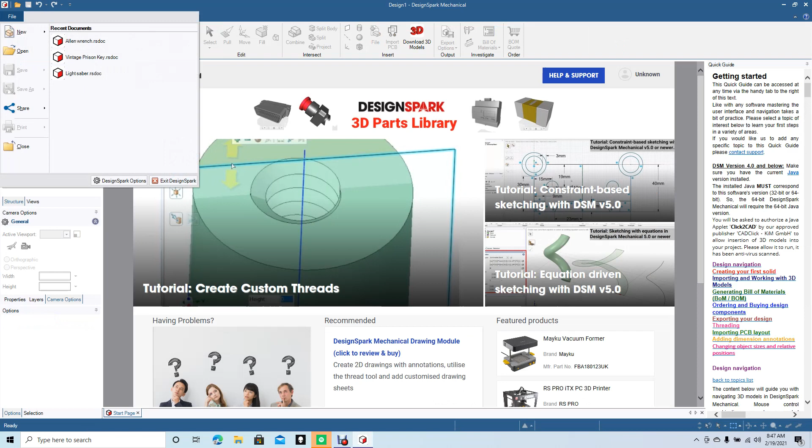Today I'm going to be showing you how to use the sweep tool to create a rubber seal for a cap. We're going to go ahead and create a new design.

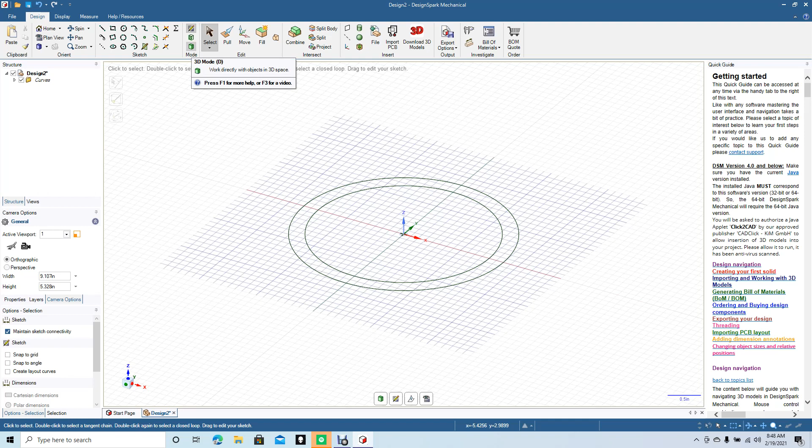Okay, now we'll select to click off. We're going to change the mode here to 3D mode. We don't need the middle part, so we'll select it and hit delete.

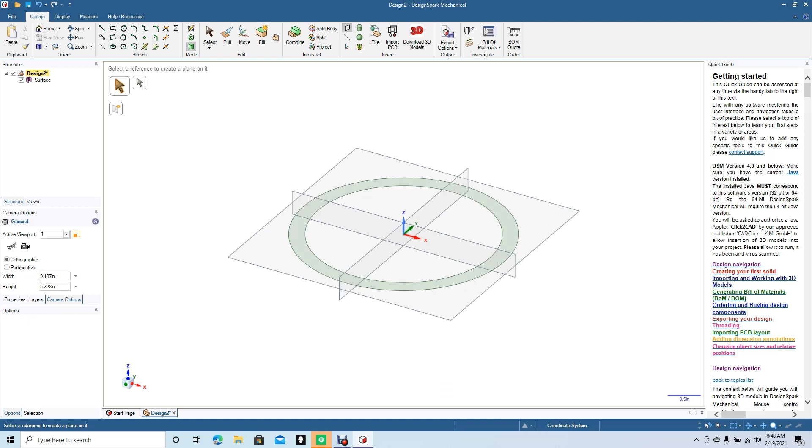We're going to add a plane, so go up to the plane tool and click it. We'll hover around to get one where we want it to go, and click OK to place it.

Now we're going to pull this part up a little bit. Select the pull tool, click on that, and click and drag up. Maybe make it 0.2. Select to click off.

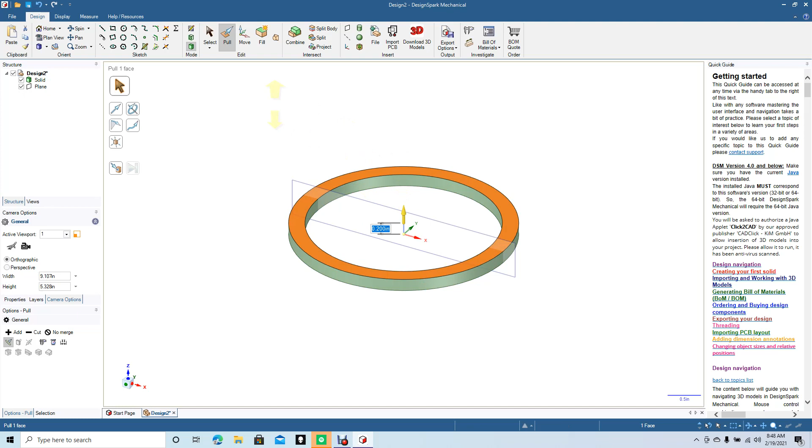Now we're going to change the orientation to front. We'll select the plane by clicking on it, and change the mode here to section mode.

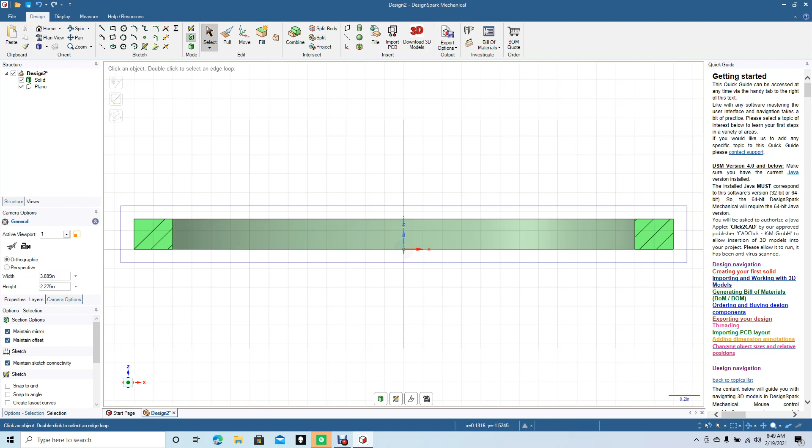Okay, now it shows us half of the circle. What we're going to do is put our seal right here. We'll Control plus to zoom in, and use the pan tool to pan over. We're going to draw a seal there.

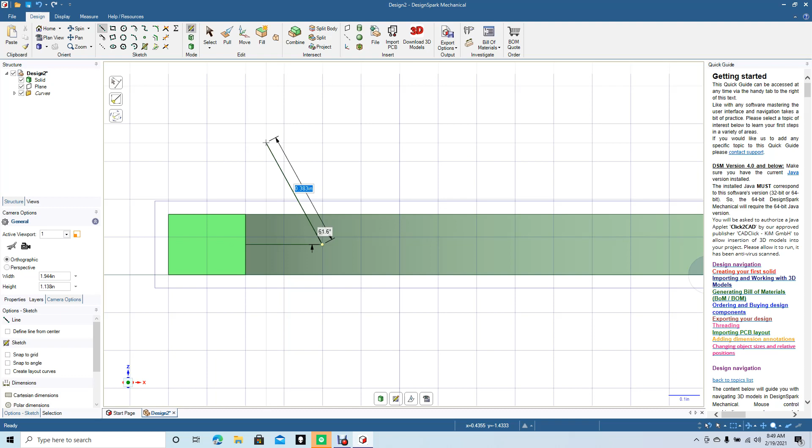We'll go ahead and get the line tool. I'm going to create a line that's a mirror line, so put a reference line in there. Select to click off. We'll right mouse click on the line and set it as mirror, so that way you only have to draw the top part and it'll replicate the bottom part.

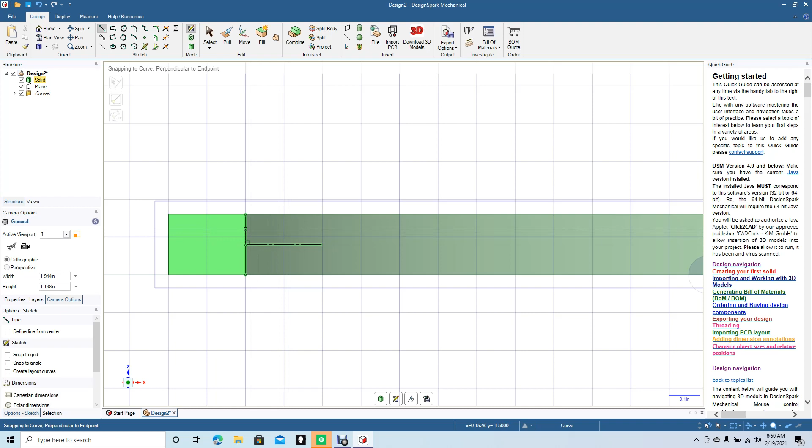Now we'll get the line tool again. We'll start up here, click, and go ahead and drag out. We don't want too big of a seal.

We'll click there, and then click there. Now we'll click select to click off of it. This is going to be like a little seal, so when you put this cap on top of a bottle, it will seal it up.

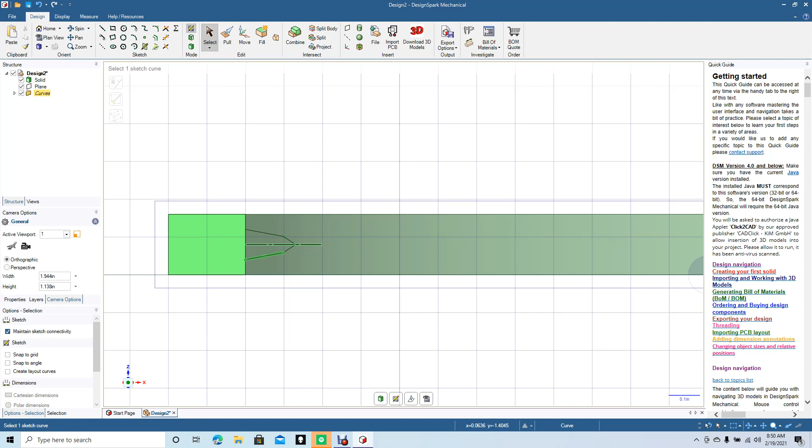Okay, now we're going to get rid of the mirror line, so hit delete. We're going to round that corner right there, so Control plus to zoom in. Get your radius tool, click there, maybe that's fine, that's 0.16 inch, so click there to change it.

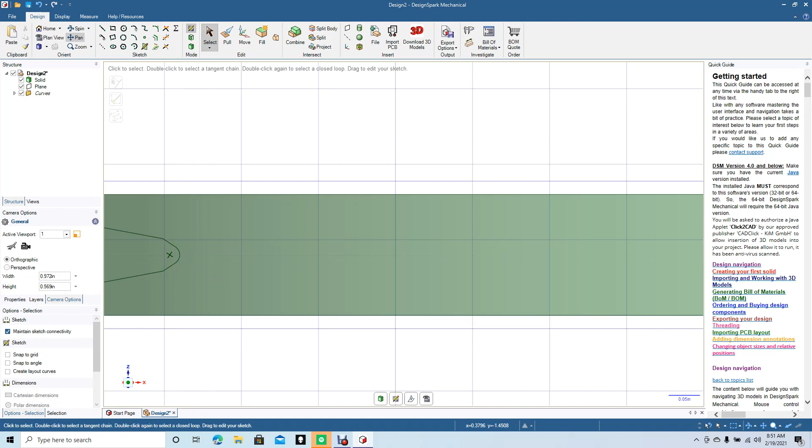Go ahead and pan over. Okay, that's not too bad. I want to round that too as well, so we'll click the radius tool again, click here, click over here. Maybe make this 0.130. That's fine, click there.

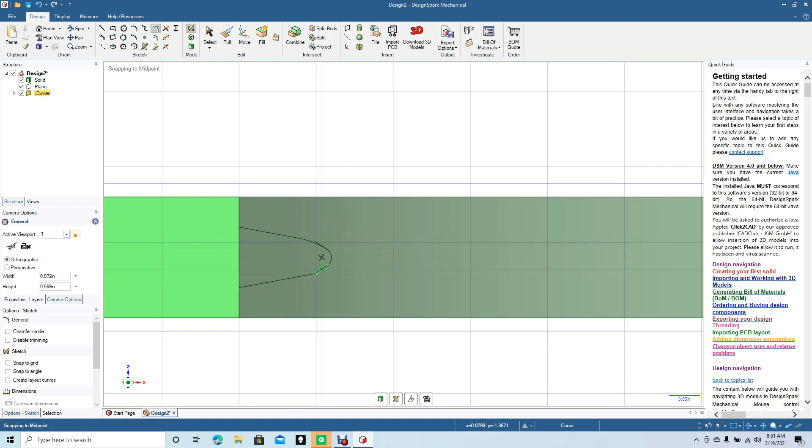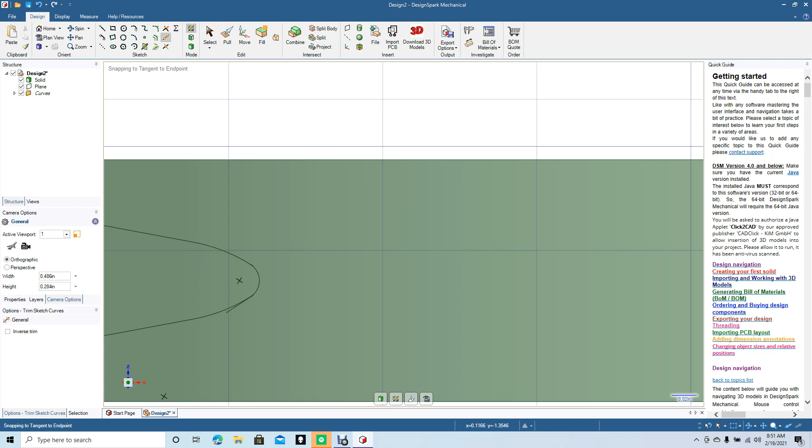Same on this side, 0.130. Okay, we'll go ahead and trim off the lines that we don't need. Control plus to zoom in. Go to the trim away tool. Trim away that, trim away, wrong line, trim away that right there. Just keep zooming in, there's some small little details there that you probably would miss.

Control plus to zoom in, pan tool to pan up to where you need to go. Get the trim tool again, delete those.

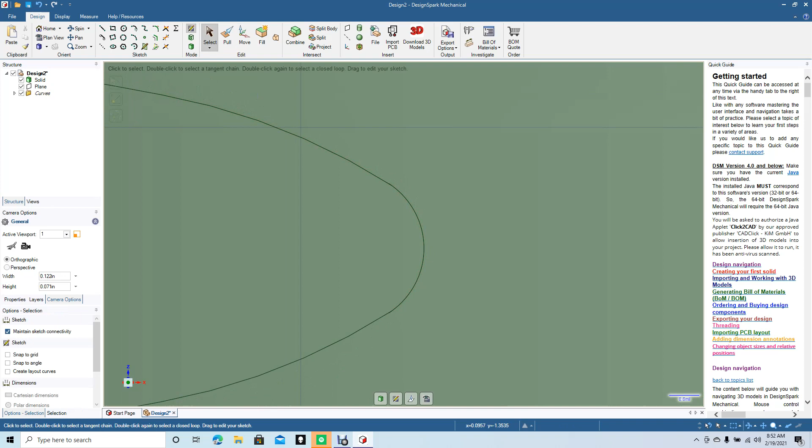Okay, probably should put another rounded cap in there. It looks like it got kind of messed up, so we'll delete this. Zoom out. Not really sure what's going on with that line, so go ahead and delete that.

And we'll use the 3-point arc. We'll put a line from there to there, that's fine, click it, select to click off. Control minus to zoom back out, and then we want to put a line right here to close this.

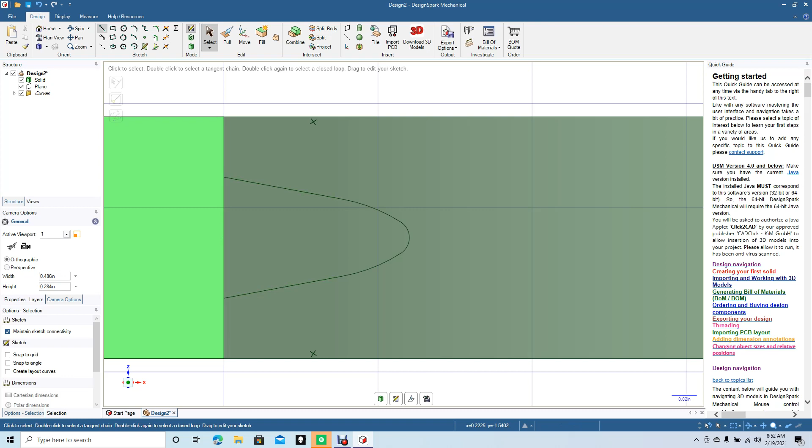So go ahead and get the line tool. We'll go from there to the bottom, click, select to click off of it. Control minus one more time.

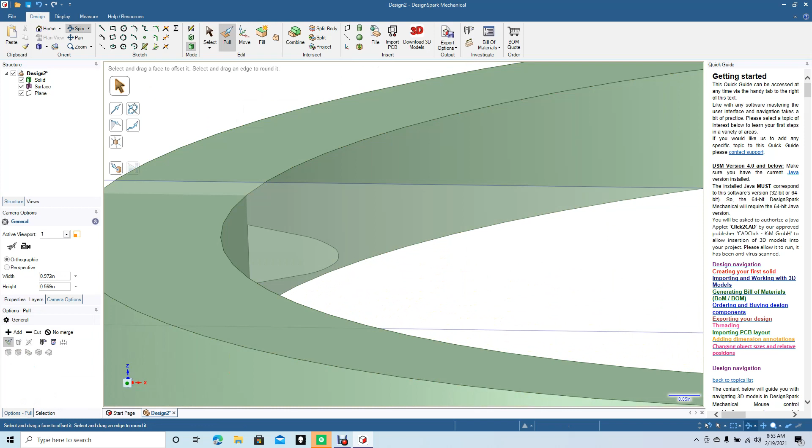Go ahead and use the spin tool to spin and see our angle. This is going to be our seal right here. So grab the pull tool, the spin tool to move it over so we can see it. Go back to the pull tool, select this part.

We're going to use this sweep along, and double click this line right here, and hit this arrow. Okay, now select to click off. And here's our seal, so we'll Control minus so you can get a better look at that.

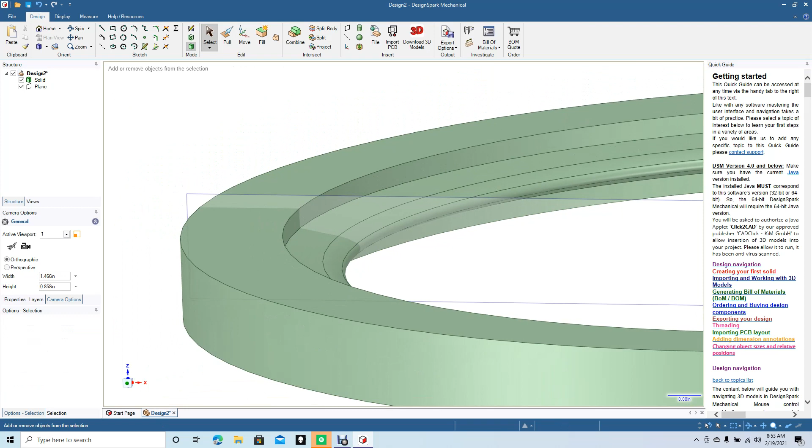Use the spin tool, click and drag. This would be like if you were going to put this cap on a bottle or something and you wanted it to seal up. So this is our seal right here.

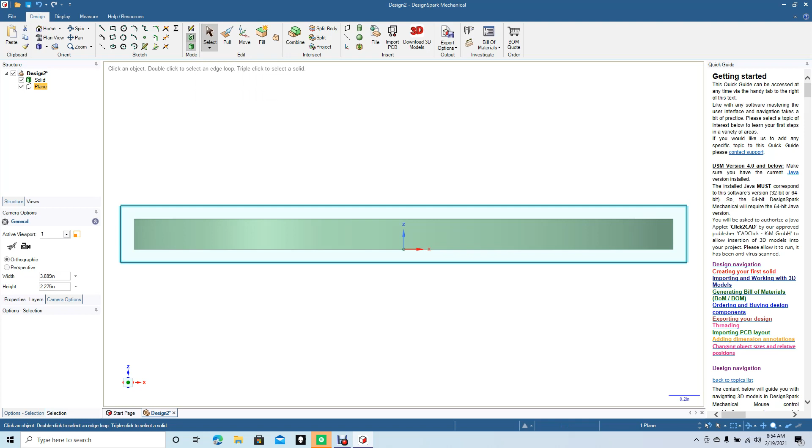So what we can do is go to the front view. We can click our plane that we created and change the view to section mode. Give it a second. Okay, so this is basically the seal right here.

So if we zoom in on this, we're going to pan over to the right. You can see the seal right there. So this is a really handy feature. You can do this to create different kinds of angles and rounded corners for if you were going to make like a window frame. It's a great little feature.